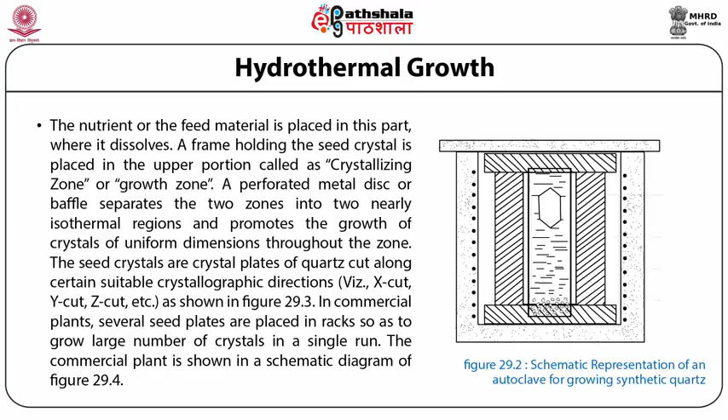In commercial plants, several seed plates are placed in racks so as to grow large number of crystals in a single run. The commercial plant is shown in a schematic diagram of figure 29.4. After the vessel is charged with solvent to the percent of fill desired, it is closed and placed in a furnace that gives the desired temperature and temperature differential. The moment temperature of the vessel reaches the operating conditions, the nutrient quartz starts dissolving and saturating the solution.

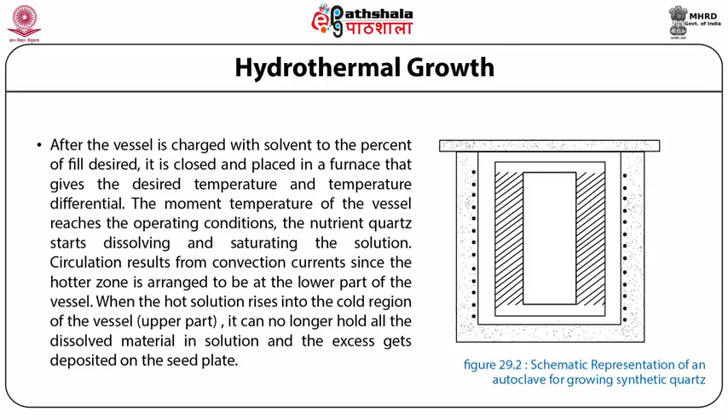Circulation results from convection currents, since the hotter zone is arranged to be at the lower part of the vessel. When the solution rises into the cold region of the vessel, that is the upper part, it can no longer hold all the dissolved material in solution and the excess gets deposited on the seed plate. The seed plate begins to grow in size. Replenishment is influenced by the baffle arrangement as it transports newly saturated solution away. This continuous cycle of solution and deposition permits the growth of large crystals.

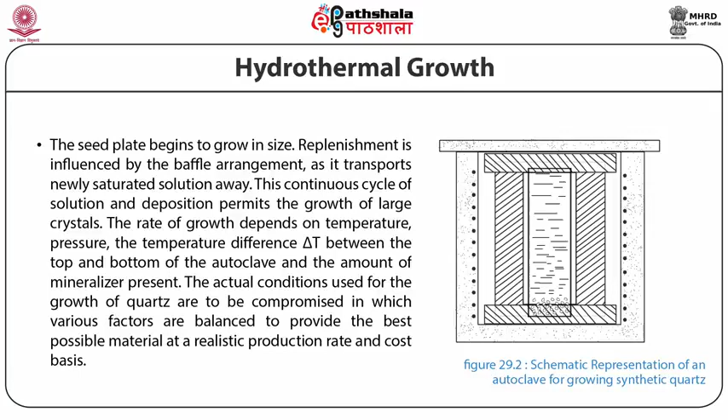The rate of growth depends on temperature, pressure, the temperature difference, delta T, between the top and bottom of the autoclave and the amount of mineralizer present. The actual conditions used for the growth of quartz are to be compromised, in which various factors are balanced to provide the best possible material at a realistic production rate and cost basis. Figure 29.3 shows the model of a quartz crystal, showing the different directions of cutting to produce oscillator plates of different characteristics and also used as seed plates for growing synthetic quartz.

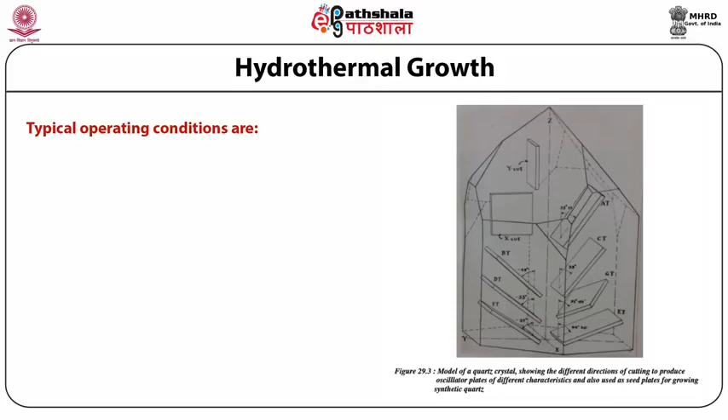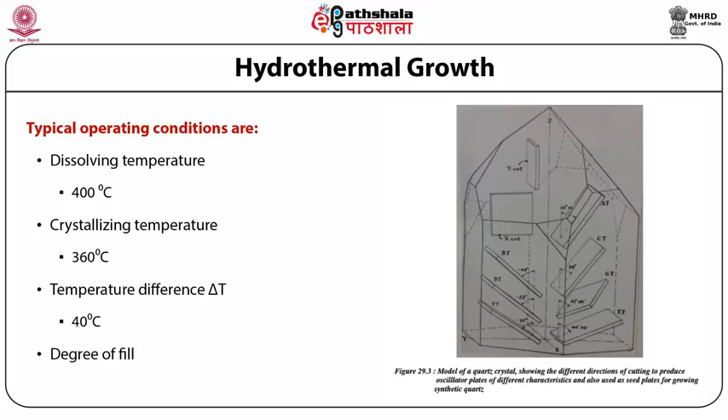Typical operating conditions for the growth of quartz are dissolving temperature 400 degrees centigrade, crystallizing temperature 360 degrees centigrade. Temperature difference delta T is maintained at 40 degrees centigrade. The degree of fill is around 80%. Aqueous alkaline solution, 1 M of sodium carbonate or sodium hydroxide.

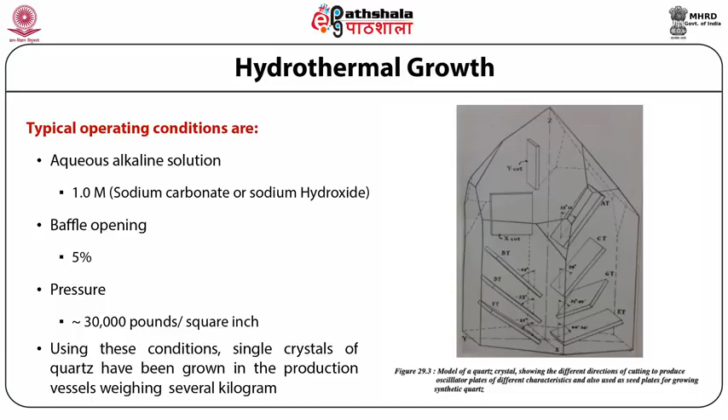Let us talk about mineralizers. The materials that are grown by hydrothermal method have either negligible solubility in water or are slightly soluble in water. To increase their solubility, some substances are added. These substances are called mineralizers. The mineralizers usually used for this purpose include both alkaline as well as neutral substances.

The alkaline substances are sodium hydroxide and sodium carbonate, whereas the substances which are more or less neutral include ammonium chloride, NH4Cl, potassium chloride, KCl, sodium chloride, NaCl, and so on. In the growth of certain crystals, acid solutions like hydrochloric acid, HCl, sulfuric acid, H2SO4, and HI are also used. Generally, increasing the concentration of the mineralizer increases the solubility of the material being grown.

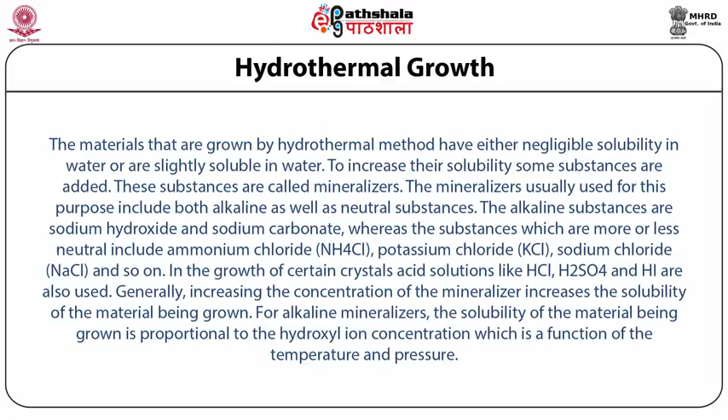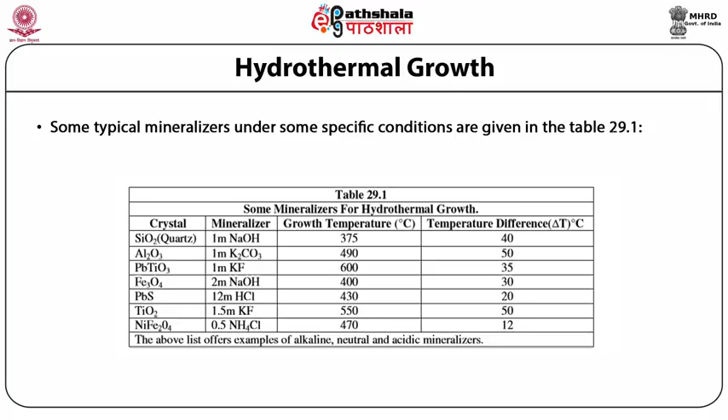For the growth of TiO2, the mineralizer used is 1.5m KF. The growth temperature is maintained at 550 degrees centigrade. The temperature difference is maintained at 50 degrees centigrade. For the growth of NiFe2O4, the mineralizer used is 0.5m NH4Cl. The growth temperature is maintained at 470 degrees centigrade, whereas the temperature difference delta T is maintained at 12 degrees centigrade. The above list that I referred to offers examples of alkaline, neutral, and acidic mineralizers.

Now we shall talk about advantages of hydrothermal crystallization. Hydrothermal crystallization offers the following advantages. Number 1, in hydrothermal growth, one usually refers to high temperature of crystallization. However, in reality, this temperature is often rather low as compared to the melting point of the material. It is this relatively low crystallization temperature that makes the technique an attractive means of crystal growth.

Number 2, the dislocation density of a hydrothermally grown crystal is less than melt-grown crystals. It is because in hydrothermal synthesis, the crystals grow under less thermal strain, whereas in melt growth, large thermal gradients are present. This low temperature also permits the growth of low temperature polymorphs, which are often unattainable by other means. Number 3, hydrothermal growth uses a closed system. In such a closed system, the atmosphere may be controlled to produce oxidizing or reducing conditions.

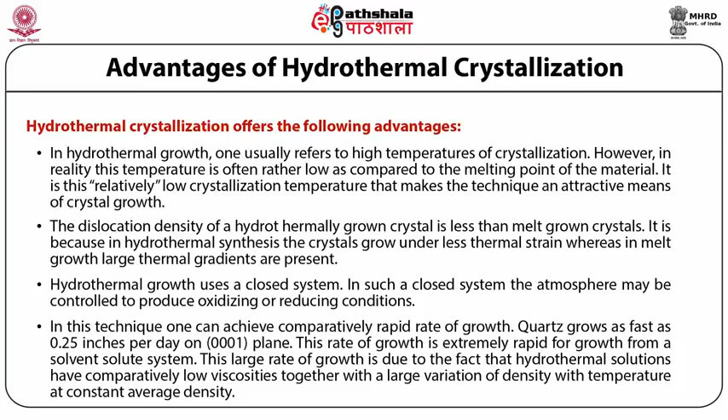Number 4, in this technique, one can achieve comparatively rapid rate of growth. Quartz grows as fast as 0.25 inches per day on the 0001 plane. This rate of growth is extremely rapid for growth from a solvent-solute system. This large rate of growth is due to the fact that hydrothermal solutions have comparatively low viscosities, together with a large variation of density with temperature at constant average density. This results in rapid convection and very efficient solute transport, permitting large growth rates.

Now let us also discuss disadvantages of hydrothermal crystallization. The hydrothermal crystallization, however, suffers from certain disadvantages which may be summarized as follows. Number 1, the need for a well-designed high-pressure vessel with a reliable closure that is capable of withstanding the high pressure generated at operating temperatures. Number 2, the vessel should be structurally strong and also chemically inert, that is corrosion resistant. It is because high purity of the grown crystal is usually of paramount importance, and even a slight autoclave attack is intolerable.

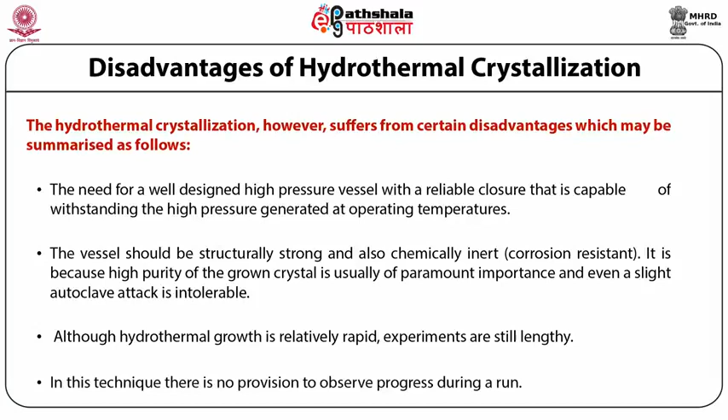Number 3, although hydrothermal growth is relatively rapid, experiments are still lengthy. Number 4, in this technique, there is no provision to observe progress during a run.

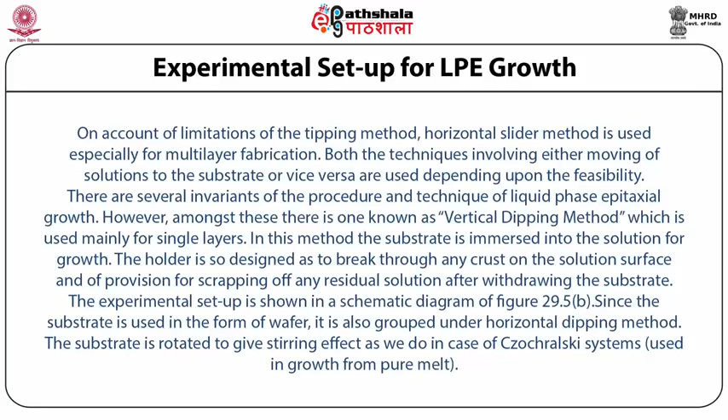The substrate is rotated to give a stirring effect, as we do in the case of Czochralski systems, which are used in the growth from pure melt. Figure 29.5a is a schematic diagram showing a horizontal liquid phase epitaxial growth system for the growth of III-V compounds as devised by Deitch 1975.

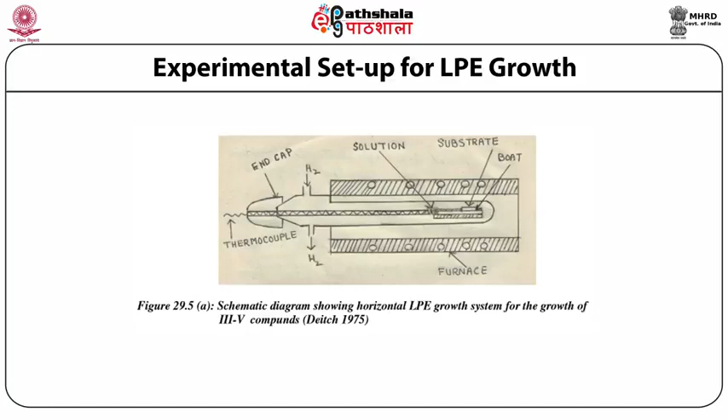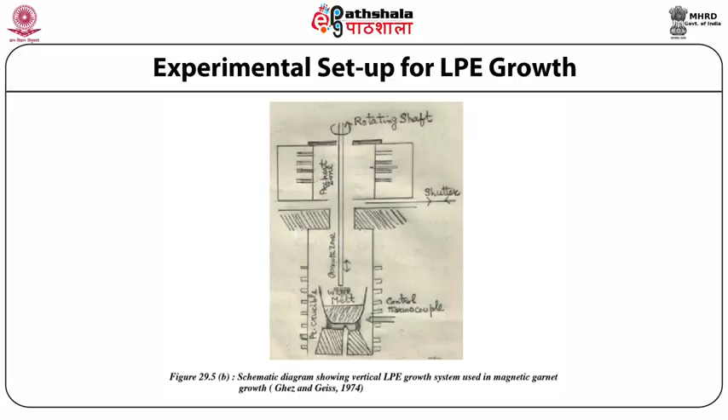And figure 29.5b is the schematic diagram showing a vertical liquid phase epitaxial growth system used in magnetic garnet growth as devised by Ghez and Geiss in 1974. Horizontal dipping is used for the growth of semiconducting crystals. However, there are two difficulties because of which the use of this technique is rather rare. The main problems are as follows.

Number one, it is difficult to design substrate holders which provide undistorted flows in semiconductor solutions on account of the limited range of compatible materials. Number two, semiconductor solutions are much less stable in the supercooled state as compared to oxide or halide-based solutions. Because of this problem, spurious nucleation is very common in semiconductor solutions.

The major uses of LPE growth are as follows. Number one, use in growth of layers where purity is of utmost importance, as required in the case of semiconducting layers. Number two, use in growth of those materials where practical alternative techniques are not available, as in the case of magnetic bubble devices.

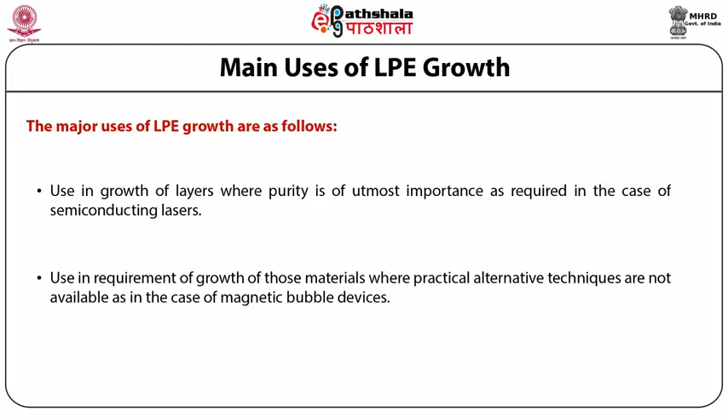At 0 degree K, the molecules have no kinetic energy and so such molecules cannot move. As such, the critical nucleus is not in a position to gain one more molecule and so eta is equal to 0 again.

Nucleation does occur at appreciable rates at some temperatures. So the eta versus temperature T curve must therefore have a maximum. If a liquid is cooled so fast past this maximum that no nuclei get time to form, it becomes a glass. We know that silicate materials are found in amorphous state in nature.

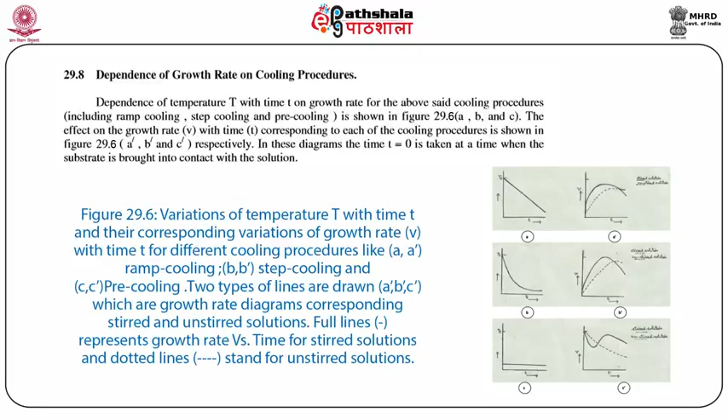In these diagrams, the time small t equal to 0 is taken at a time when the substrate is brought into contact with the solution. Figure 29.6 A, B, C and A', B', C' show variations of temperature T with time t and their corresponding variations of growth rate v with time t for different cooling procedures: A A' ramp cooling, B B' step cooling, C C' pre-cooling.

Two types of lines are drawn in A prime, B prime, C prime, which are growth rate diagrams corresponding to stirred and unstirred solutions. In this figure, the full lines represent growth rate versus time for stirred solutions, whereas the dotted lines stand for unstirred solutions.

Let us discuss each of the curves of temperature capital T versus time small t for three cooling procedures and the corresponding curves of growth rate versus time t. Ts represents saturation temperature. For the ramp cooling case as represented by figure A A prime, the growth rate is almost zero, which subsequently rises as the supersaturation increases. But after some time, it decreases.

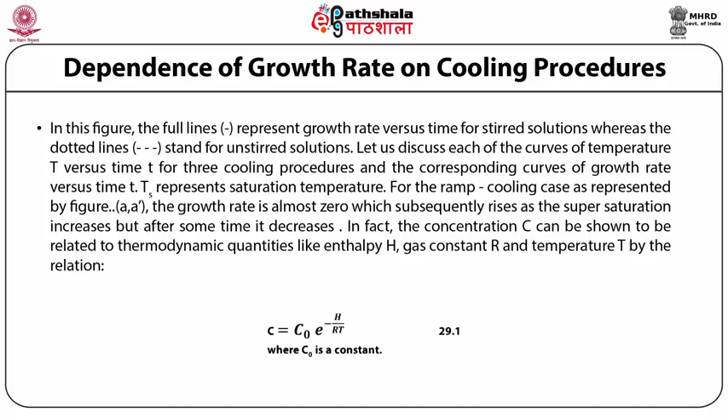In fact, the concentration capital C can be shown to be related to thermodynamic quantities like enthalpy H, gas constant R, and temperature T by the relation C = C0 exp(-H/RT), given as equation 29.1, where C0 is a constant. If the solution is cooled by delta T, it makes available for precipitation and hence growth an amount which for small delta T is given by delta C approximately equal to C0 H delta T / RT² times exp(-H/RT), which is given here as equation number 29.2.

For a given delta T, delta C will decrease as T decreases. There is a possibility of cooling faster as T falls to cancel this effect. However, an initial transient will always occur. If cooling is done stepwise, the same initial transient effect will occur, but additionally, with the passage of time, the solution gets exhausted, and for long growth periods, the growth rate decreases. The said solution exhaustion does happen when pre-cooling is done.

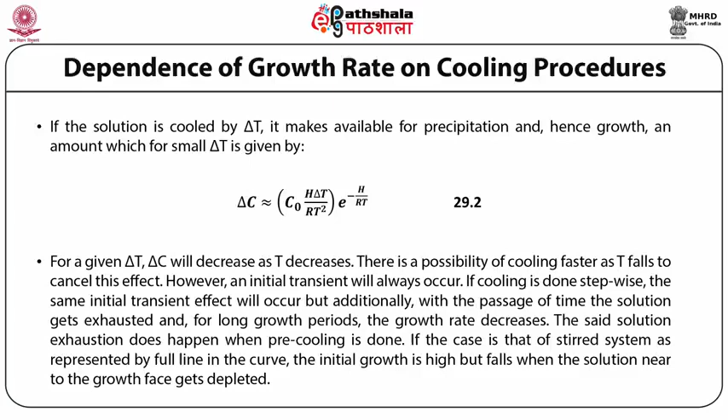If the case is that of a stirred system represented by the full line in the curve, the initial growth is high but falls when the solution near to the growth face gets depleted. It continues for a time given by the expression delta squared upon D, where delta represents solute boundary layer thickness and capital D is the diffusion coefficient.

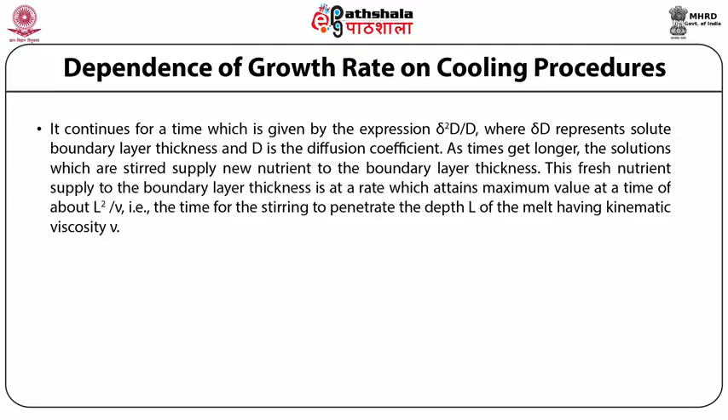As times get longer, the solutions which are stirred supply new nutrient to the boundary layer. This fresh nutrient supplied to the boundary layer is at a rate which attains maximum value at a time of about L squared upon v. That is the time for the stirring to penetrate the depth L of the melt having kinematic viscosity small v.

The detailed theory of this process is given in the references cited here and are suggested for any extra information on the subject matter, like Brice J.C. in 1976 in Crystal Growth and Materials, edited by E. Kaldis and H.J. Scheel. Publishers are North Holland, Amsterdam, chapter 11.3.

Next is Elwell D. 1976 in Crystal Growth and Materials, edited by E. Kaldis and H.J. Scheel, published by North Holland, Amsterdam, chapter 11.6, and Elwell D. and Scheel, H.J. in 1975, Crystal Growth from High Temperature Solutions, published by the Academic Press, New York.

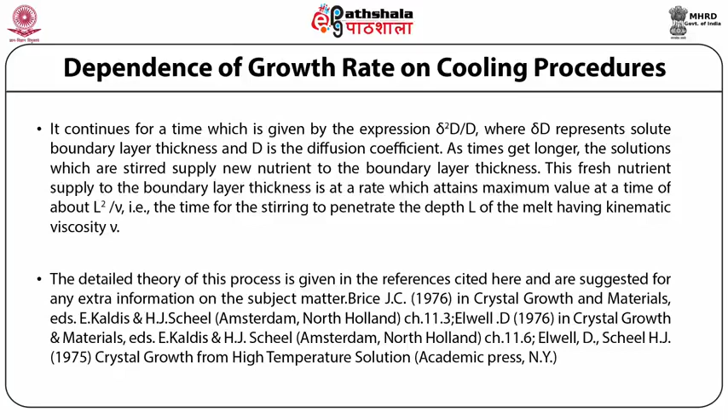High pressure growth. High pressure growth technique has been applied for the crystallization of diamond. The first confirmed synthesis was reported in 1955 by the General Electric Company in the United States of America. Very high pressure is needed for the synthesis of diamond. Pressure alone is not adequate, since the growth rate has to be kept rapid enough by the use of high temperatures.

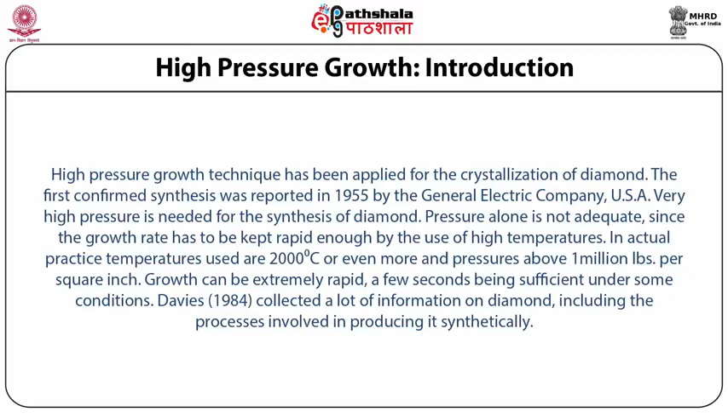In actual practice, temperatures used are 2000 degrees centigrade or even more, and pressures above 1 million pounds per square inch. Growth can be extremely rapid, a few seconds being sufficient under some conditions. Davies in 1984 collected a lot of information on diamond, including the processes involved in producing it synthetically. Now let us see what is the apparatus used.

The equipment used for such high pressures consists of large hydraulic presses with dies of special high-strength alloys. These concentrate large pressure onto very small volumes, typically less than 1 cubic inch in volume. The natural mineral pyrophyllite is used as a gasket material since it deforms to transmit the high pressure but does not extrude out of the high pressure region. Electric current is passed through the growth region via insulated press plungers for heating the system.

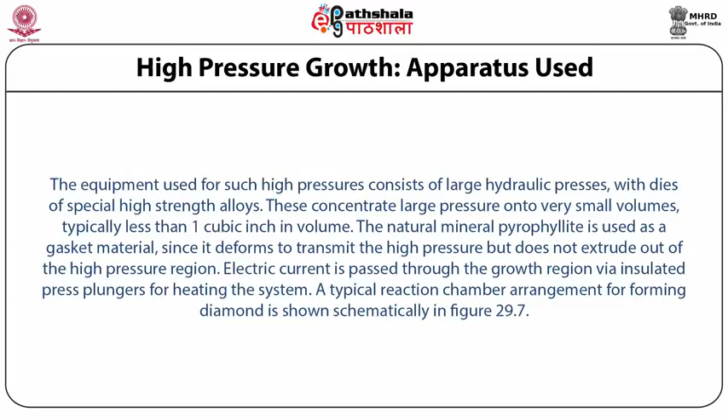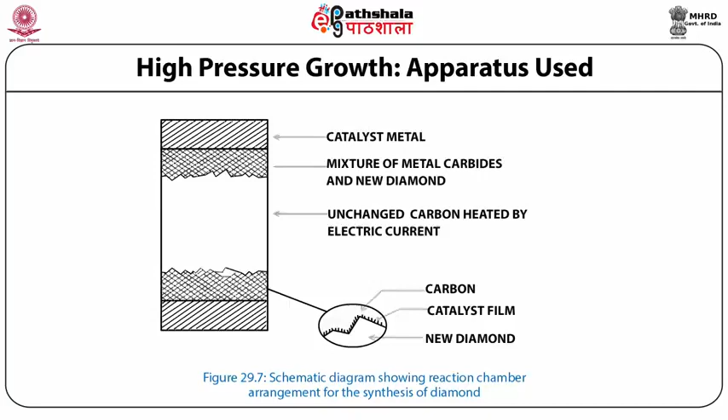A typical reaction chamber arrangement for forming diamond is shown schematically in figure 29.7. Figure 29.7 is a schematic diagram showing reaction chamber arrangement for the synthesis of diamond.

We shall now talk about liquid encapsulation Czochralski, abbreviated as LEC growth. When crystals having volatile components are to be grown, a different set of problems come up. LEC is a technique which falls under the category of crystal pulling techniques, which has been developed to overcome one of the main material limitations of crystal pulling, namely that the material to be grown is required to have a relatively low vapor pressure. It is widely used for the growth of III-V semiconductor compounds such as gallium arsenide, indium phosphide, and gallium phosphide.

Consider growth of gallium arsenide: the solid with the maximum melting point, to the tune of 1238 degrees centigrade, is in equilibrium with arsenic vapor with a partial pressure of about 1 atmosphere. The arsenic vapor needed is mostly As2. Arsenic vapor at a partial pressure of 1 atmosphere can be provided by an arsenic source maintained at a temperature of 612 degrees centigrade, and the system should not contain any region cooler than the arsenic source.

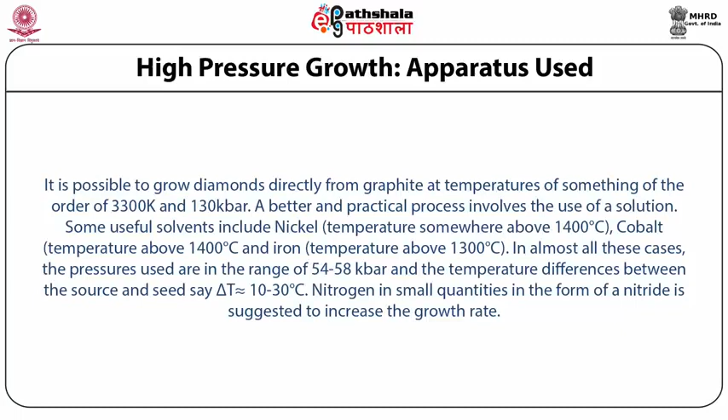It is possible to grow diamonds directly from graphite at temperatures of the order of 3300 K and 130 kilobar. A better and practical process involves the use of a solution. Some useful solvents include nickel, temperature above 1400 degrees centigrade, cobalt, temperature above 1400 degrees centigrade, and iron, temperature above 1300 degrees centigrade. In almost all these cases, the pressures used are in the range of 54 to 58 kilobar, and the temperature differences between the source and seed, delta T, of the order of 10 to 30 degrees centigrade. Nitrogen in small quantities in the form of a nitride is suggested to increase the growth rate.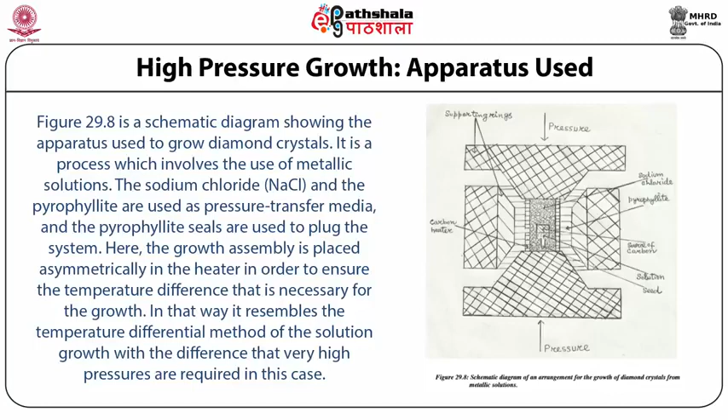Figure 29.8 is a schematic diagram showing the apparatus used to grow diamond crystals. It is a process which involves the use of metallic solutions. Sodium chloride, NaCl, and pyrophyllite are used as pressure transfer media, and pyrophyllite seals are used to plug the system. Here, the growth assembly is placed asymmetrically in the heater in order to ensure the temperature difference that's necessary for the growth. In that way, it resembles the temperature differential method of solution growth, with the difference that very high pressures are required in this case. Figure 29.8 is a schematic diagram of an arrangement for the growth of diamond crystals from metallic solutions.

So, students, let us summarize what we have learned in this module. We have learned about the hydrothermal crystallization technique, particularly concerning the growth of quartz. The requirements of mineralizers are also explained. The advantages and disadvantages of the hydrothermal method are specified. Liquid phase epitaxial growth and the apparatus used for the same are described, particularly for the growth of III-V compounds and magnetic garnets. Dependence of growth rate on cooling procedures, including ramp cooling, step cooling, and pre-cooling, is discussed. Reaction chamber arrangement for the synthesis of diamond is described. In general, high pressure growth is discussed.